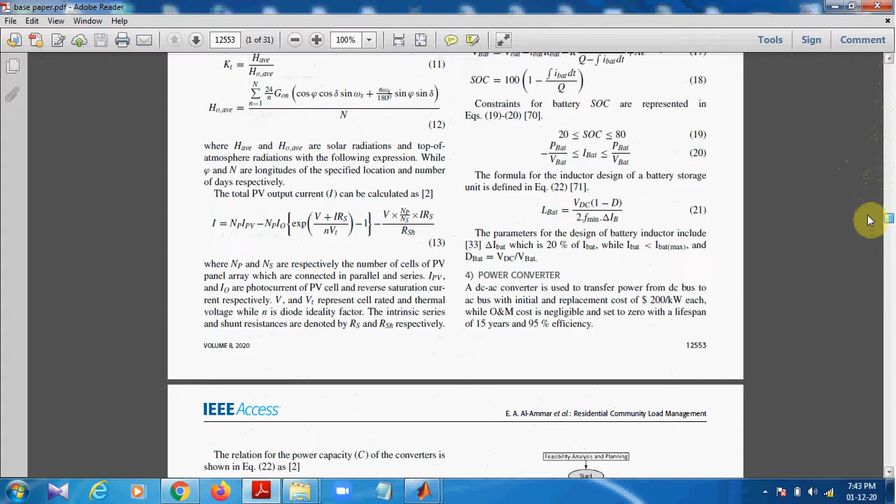The project title is Residential Community Load Management based on optimal design of standalone HRS with model predictive control, that is MPC controller. So in this paper, the author has proposed an MPC control mechanism for a smart grid, which has multiple renewable energy sources. Renewable energy sources might be solar PV, wind, battery, diesel source, etc.

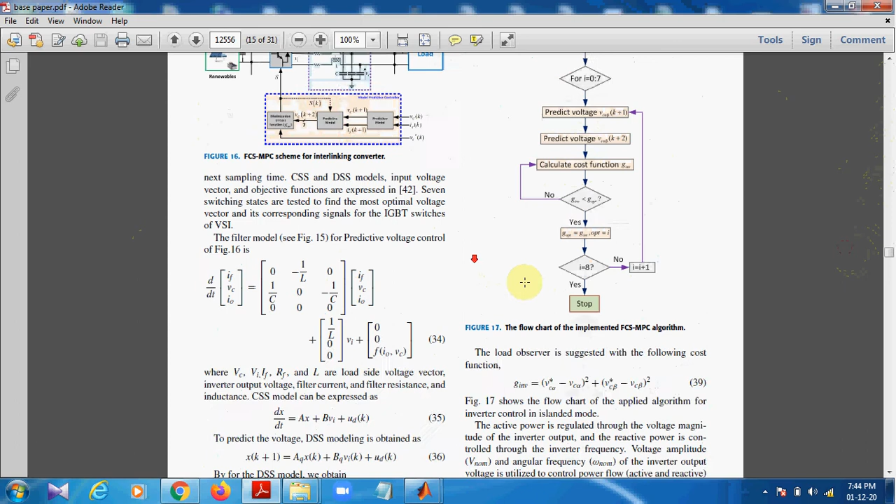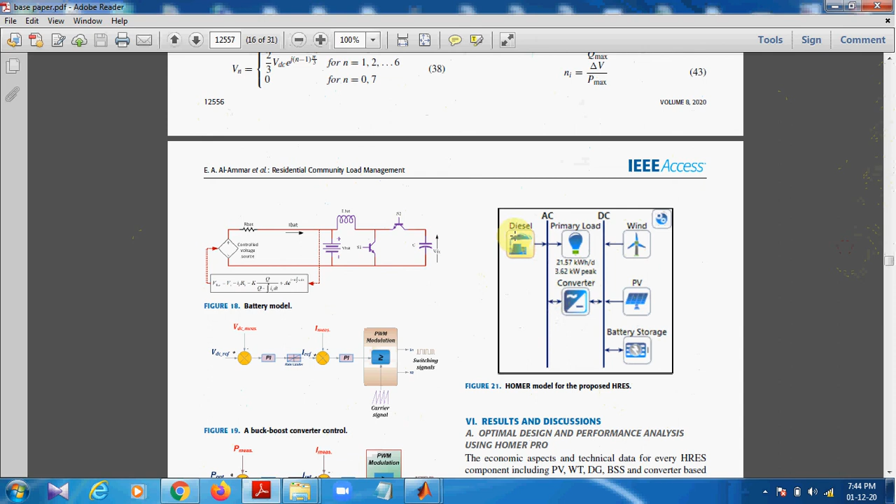So in that we are going to monitor disturbance and voltage, predictive voltage, and its cost function to maintain the MPC configuration. So here we can see our proposed HRES structure. In that, wind, PV, battery storage, and diesel are taken. All these DC sources, wind, PV, and battery storage, are connected to the converter, and then it is giving supply to the AC bus. Diesel is giving the AC bus supply directly, and the supply is consumed by the primary load.

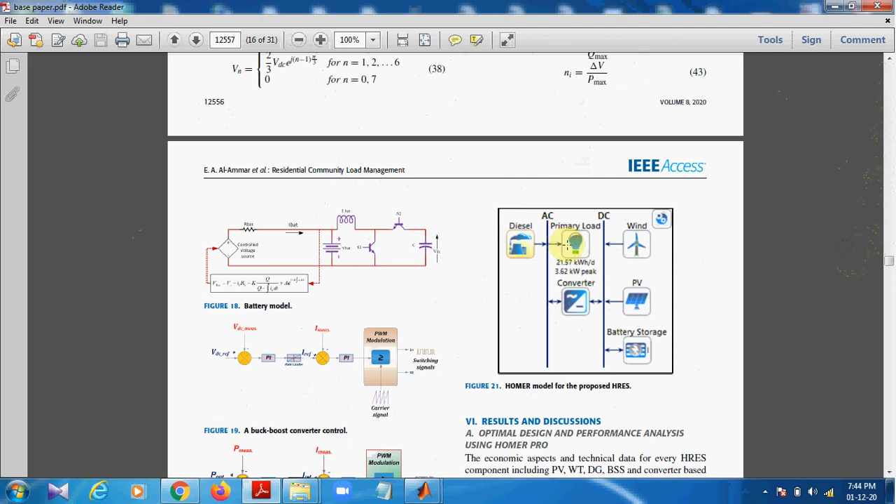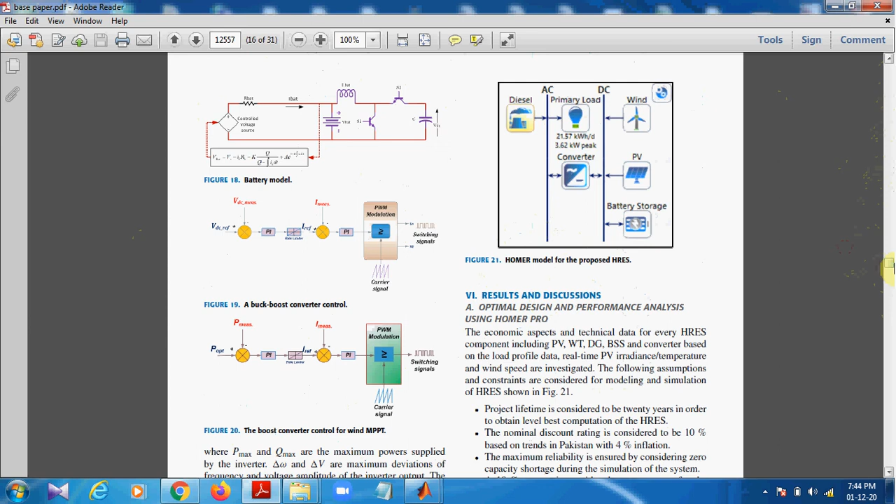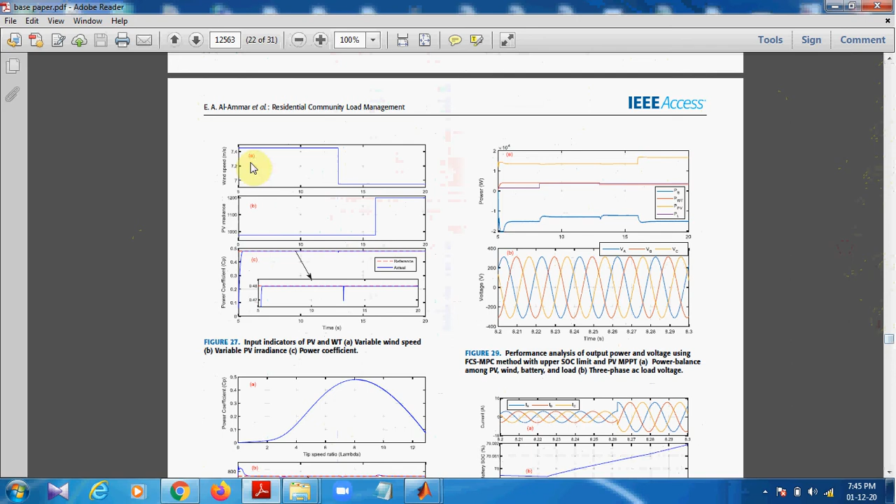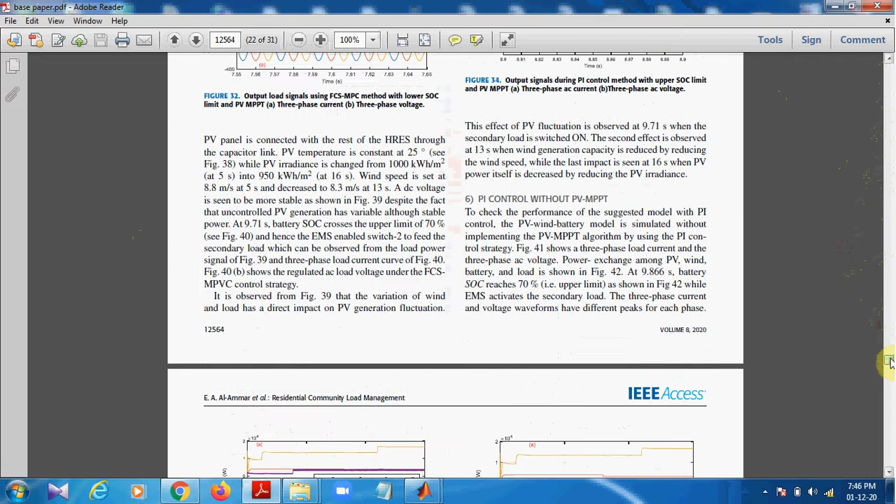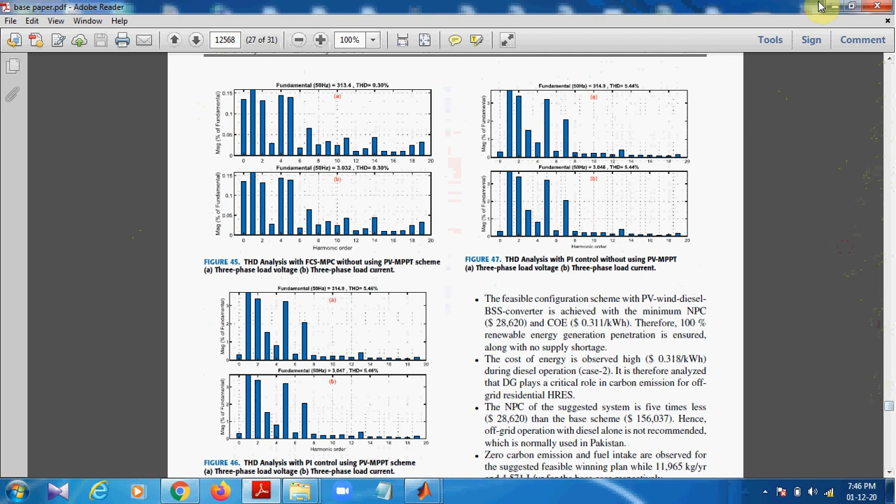We are going to monitor various characteristics of the circuit, that is power, PV irradiance, wind speed, voltage, power coefficients, and battery SOC percentage. These are the various properties which we will analyze from the existing system. Afterwards we'll see how the MPC controller is performing a better solution than the existing system. This is how this project is elaborated. So we'll start with the simulation.

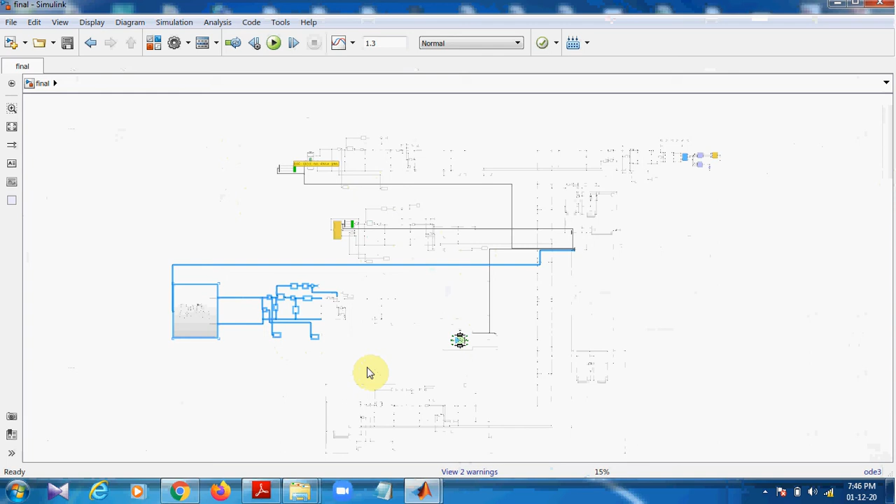Here we have created one Simulink model. Since the model is very big, it is in zoomed-out manner. So I'll elaborate. This part is the battery model, this part is fuel cell, this part is wind turbine, wind generator. This is the solar PV model, which is connected to the AC bus. This supply is connected to the grid as well, and after the grid we are showing some load, that is non-critical and critical load. This is non-critical load, that is household, and this is critical load, that is industrial load.

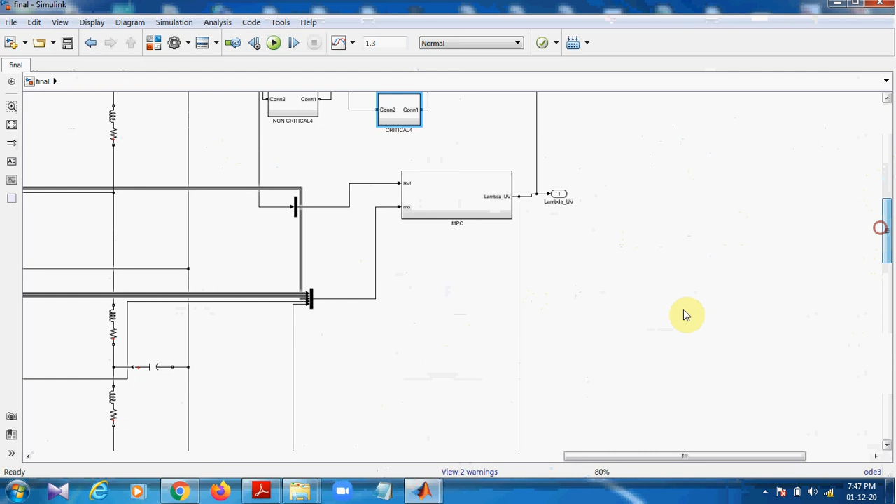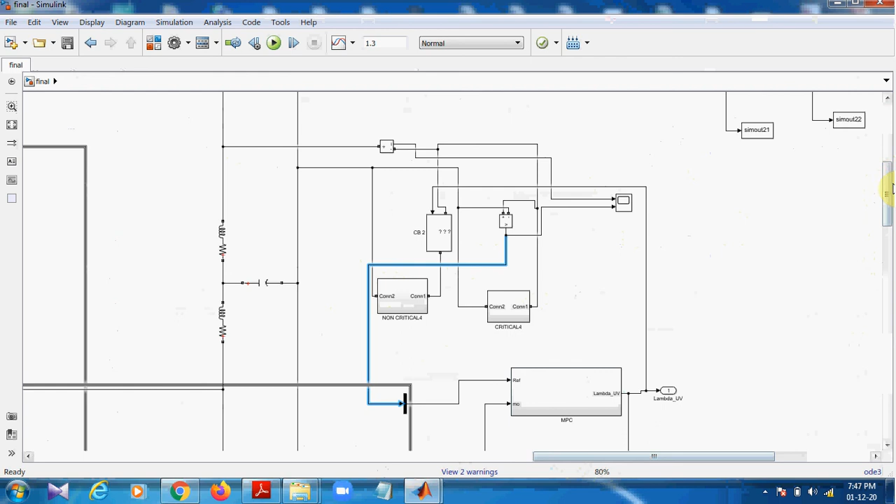We have created the MPC controller here, which is taking the MO, that is observations from our produced data. All the 6 inputs are given to the MPC controller, and produced voltage, that is the outcome of all these 5 systems, is given as a reference to the MPC controller, which is producing the lambda UV, which is given to the circuit breaker, that is the switch to all loads. These are different types of loads which we have connected in the system. So we'll see how this system is performing.

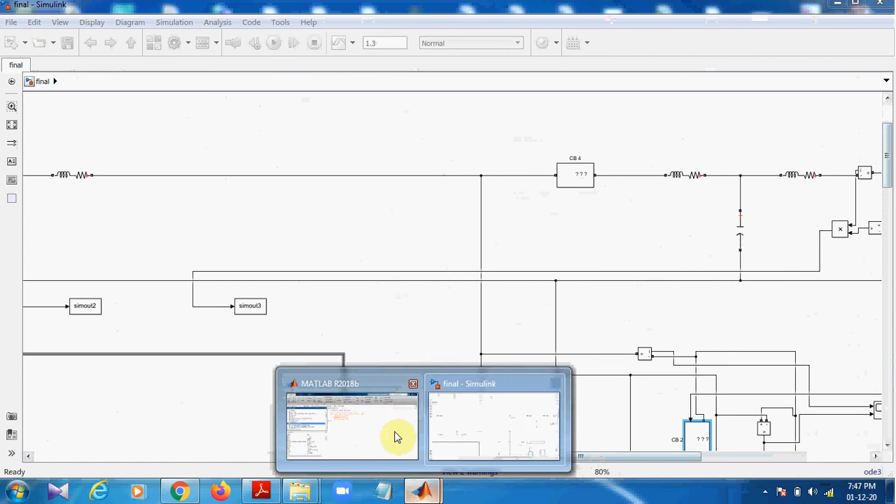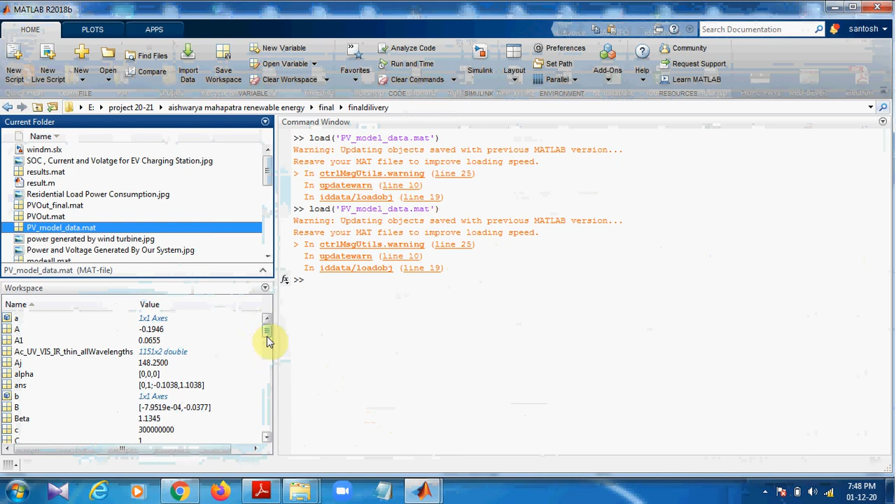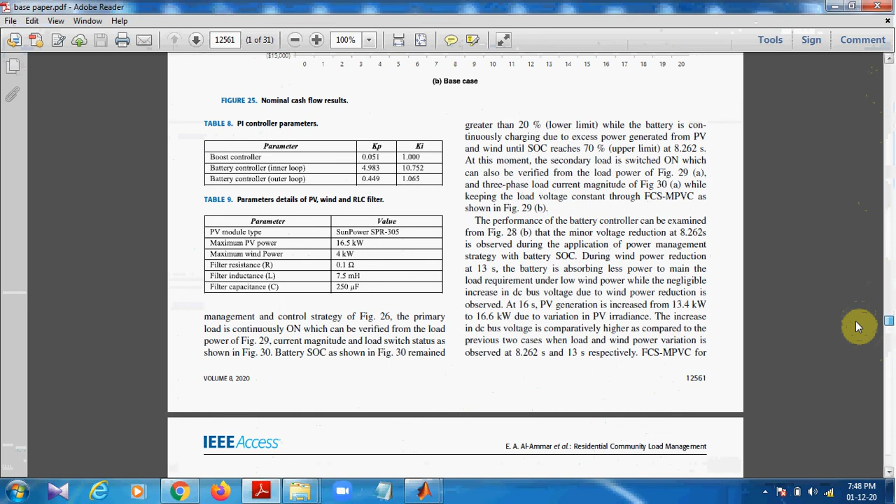Initially, before starting the system, we have to load some simulation properties over here. So we'll load the PV model characteristics here. These PV model characteristics are given as an input to the system. This PV model data has various characteristics like alpha, beta, different values. There are lots of values which are given. These values were specified in this paper in various sections, like KP, KI, maximum power, wind. There are lots of properties given. These properties were converted into this PV model data.mat file.

Once we load that mat file, we have to run the simulation. Once we run the simulation, it will first compile. So we'll see how it is working. After compilation, it will start executing. It will give some plots for different sections. See, the simulation is started. It is showing some SOC.

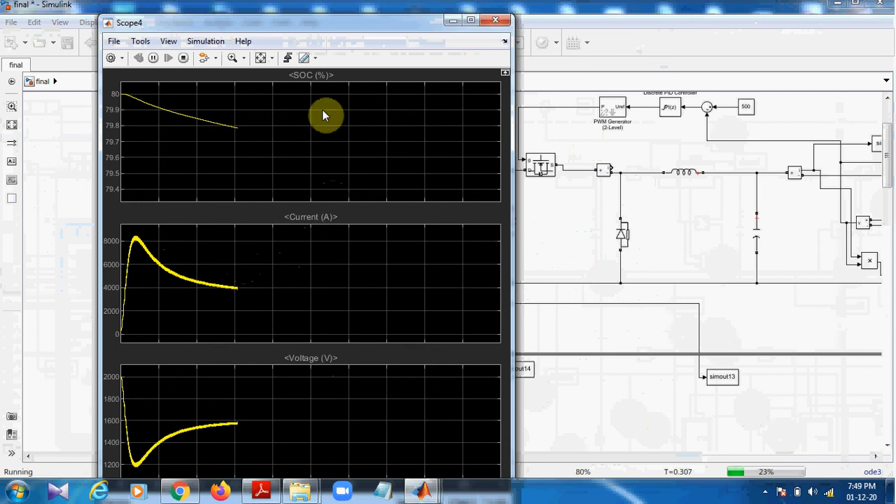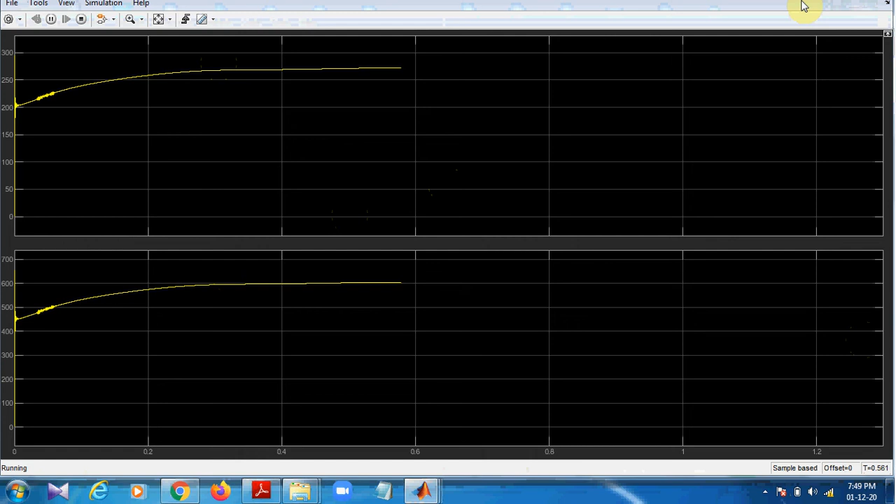There are various values, SOC, current, voltage, which we can see here. See, this is how current, voltage and SOC are printed for the battery model. Then we'll see different things. We'll go to the SMC controller. Here we can see the power and voltage produced by our system, which is the final outcome of the system. We'll see other graphs.

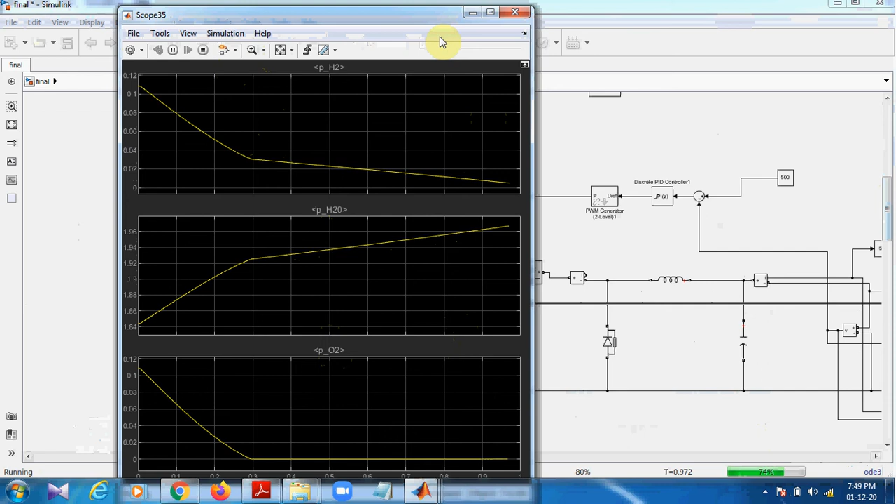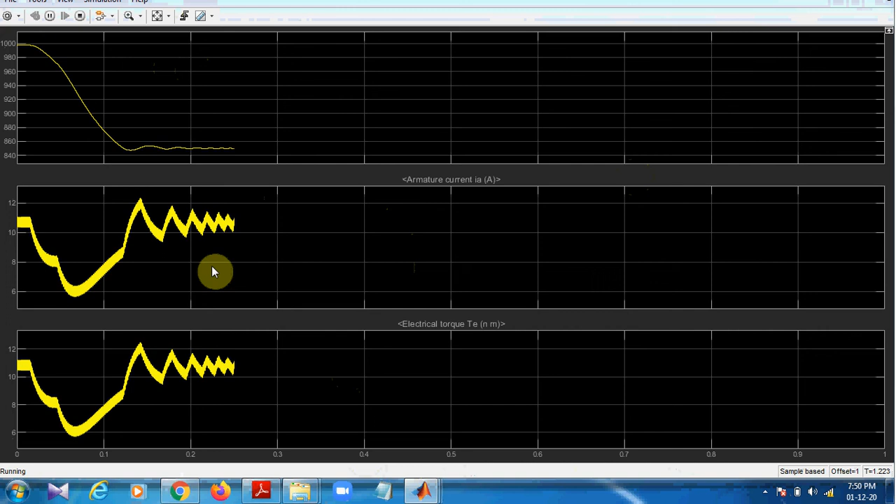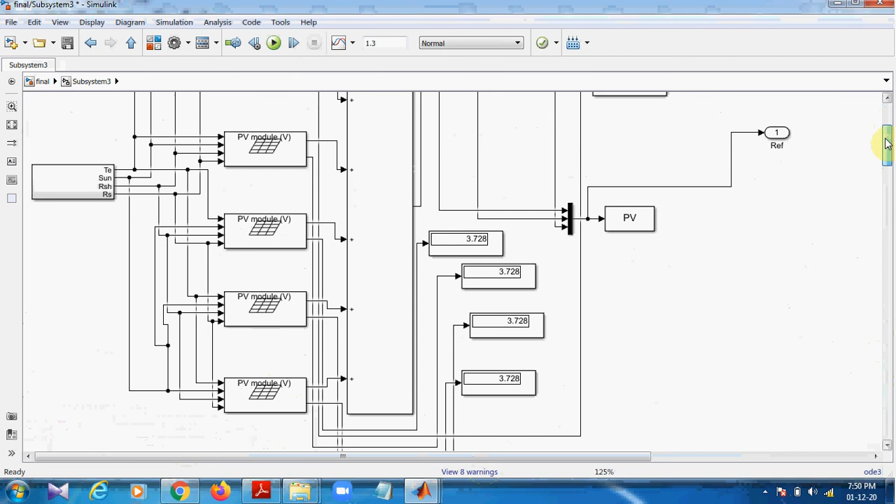Okay, so our simulation is completed. This is how we can see power generated by our system, power graph by wind turbine. We'll go back to base model. Okay. Here we have given a PV array model which is generating the power to our system, which is given to a bus.

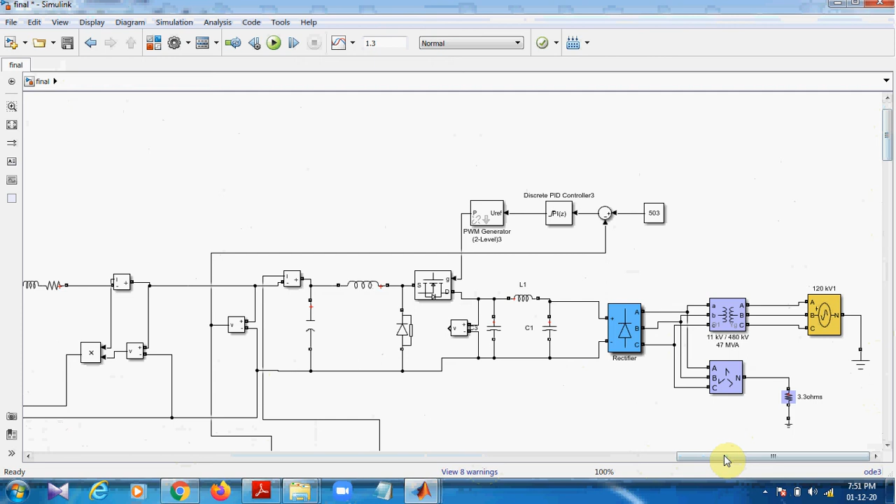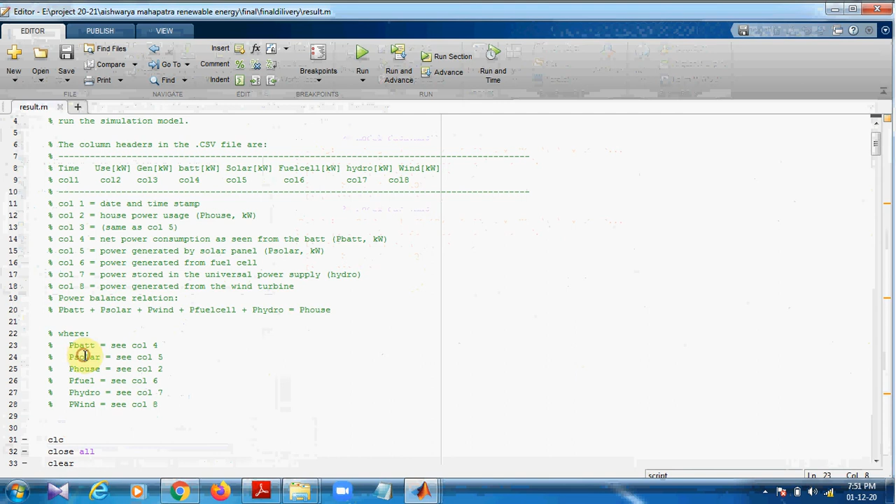Okay, so now we have completed the simulation and shown how simulation is working. After this simulation, we have to plot various graphs related to final outcome. I'll show you how to plot the graph. For plotting the graph, I have created one function, that is result.m. So here we have taken all the parameters from various sources like battery, solar, fuel cell, hydro, wind, and all column signals were taken. We are plotting the graph with respect to the various utilization of energy.

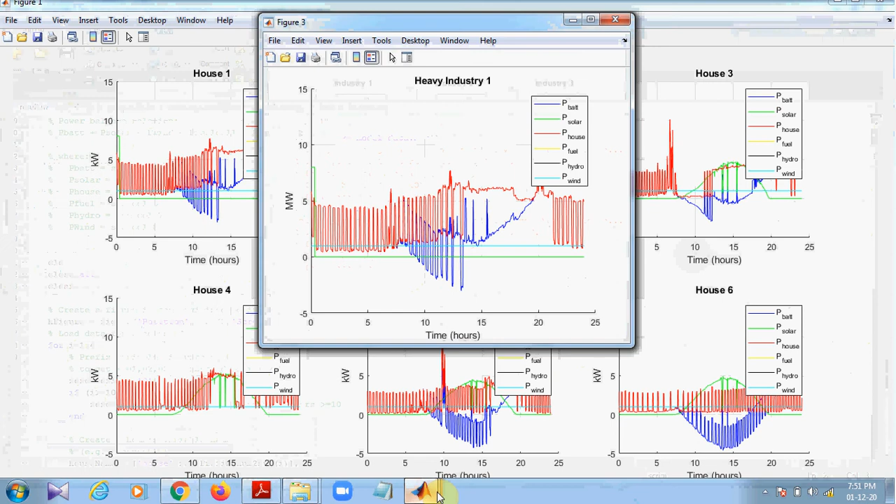We'll run this graph here. So once we run, it will plot various graphs. We'll see one by one. So this is the graph which shows the power utilization of heavy industry. We have created the 24-hour simulation. See, 0 to 25 values are there, so up to 24 it is plotting the value. So this is 24-hour simulation. Within the 24 hours, how this heavy industry is utilizing various power. These are various power provided by different sources like the battery, solar, house, fuel, hydro, wind, and all. So all respective colors present the total power consumption from various sources by heavy industry.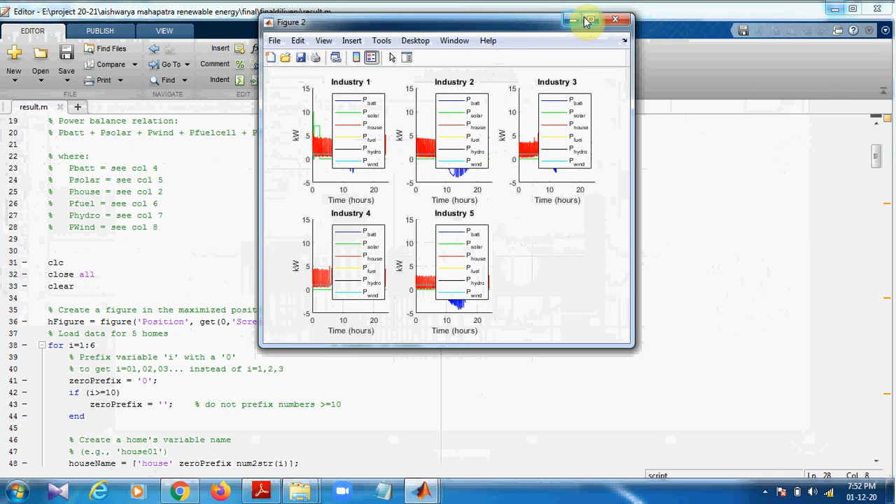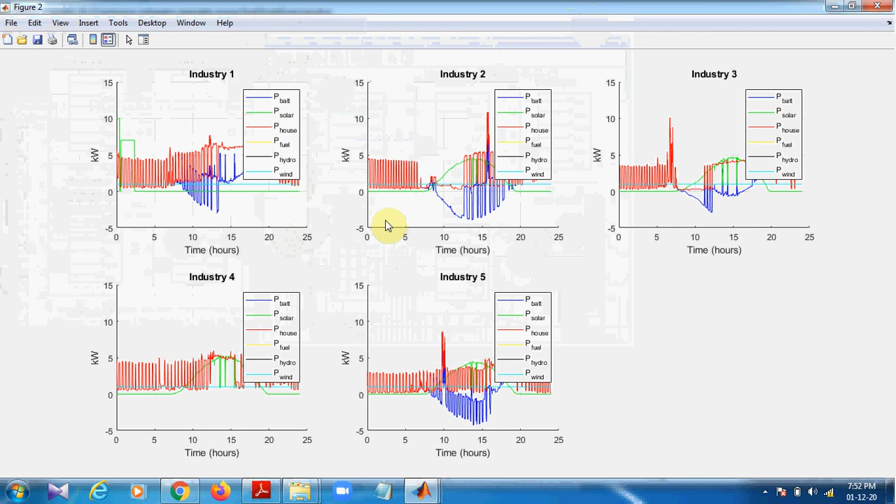Likewise, you can see here this is the power consumption by different small industry. We have created 5 small industry models. So these 5 industry models are consuming power from various sources. Same, we have created a 24-hour simulation model, and it is generating the graph for power consumption from various sources. As with the industries, we have created the house model as well.

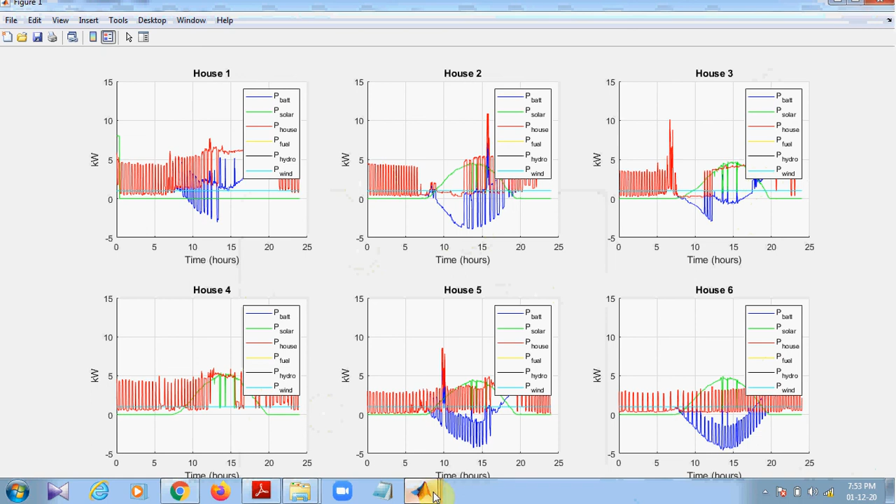So this is the model showing houses, house 1, 2, 3, 4, 5, 6, which are consuming power from our different sources. All the colors represent how much power is consumed at various times, and the power is shown in kilowatts. For industry it is in kilowatts, and for heavy industry it is in megawatts.

So this is how this system is represented, and based on this simulation we can show that we have created one hybrid grid, a smart grid, which has different sources like solar, fuel cell, wind turbine. This is a different fuel cell, and this is a different fuel cell, and a battery, which is controlled by SMC controller and giving the input to our loads. So this is how we have shown the system.

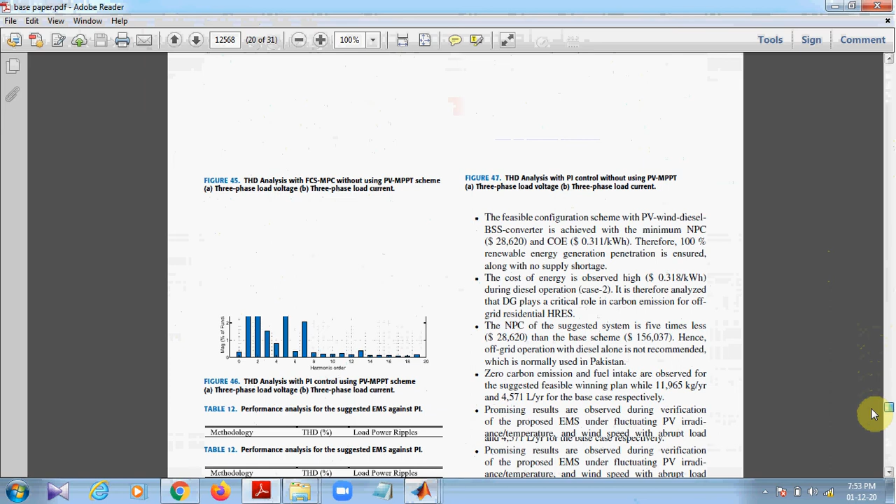We'll see how this system is similar to this base paper. See, here is one system presented by the authors. Here they have created three sources: PV, wind, and battery. Along with these three sources, as our own contribution, we have taken other sources too, like fuel cell and all. These sources give their production output to MPC controller, and MPC controller gives data to load. This is how we have evaluated our system, and hence the system is proven.

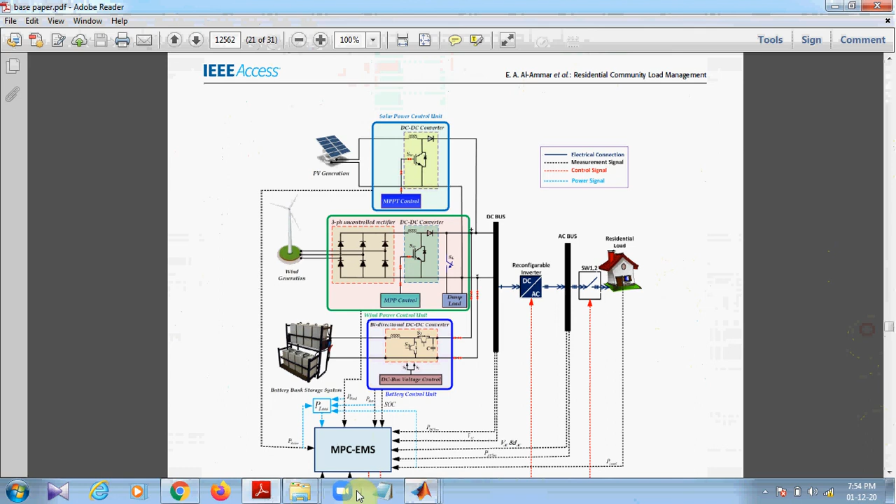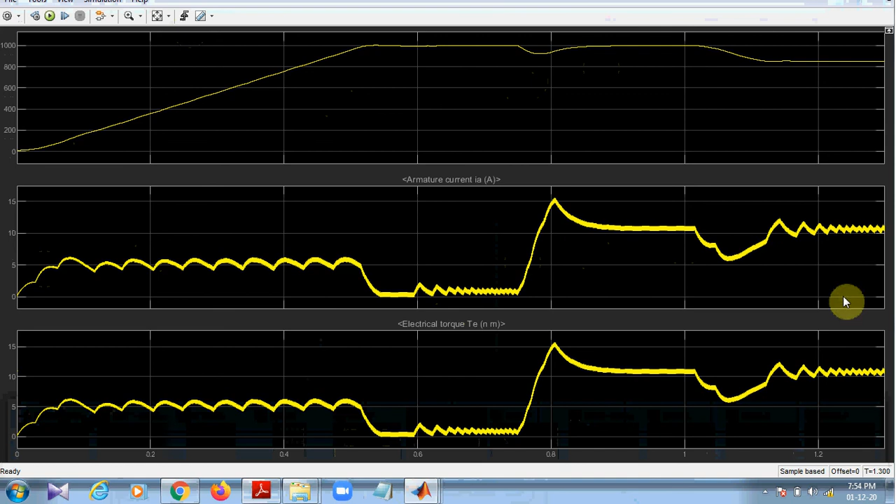And based on our output, it is shown that our system is giving the better outcome in terms of different kinds of results. Like we can see this graph as an outcome, in terms of, let's say, current and torque. This is showing the stable outcome from various perspectives. So this is how we have created the system.